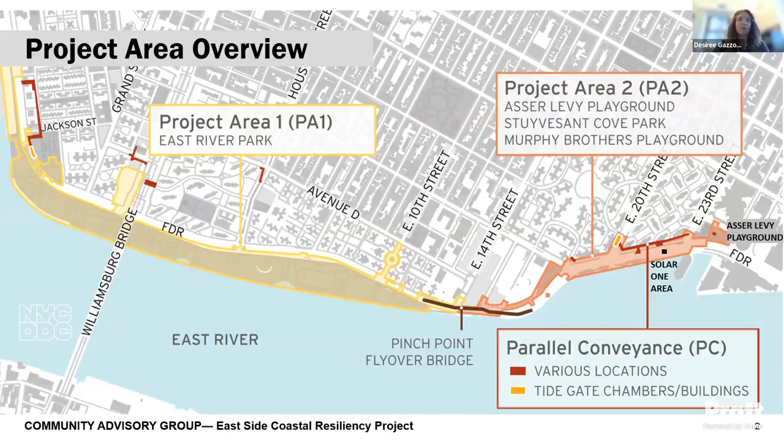So as we get into the presentation, this is the project area overview, which we are all very aware of. The focus area topics tonight will honestly focus mostly on construction progress. We have some items to discuss and a view of our park amenities, still under construction, and a couple of other items.

We did receive the letter from the CAG on the follow-up walkthrough items. So we have incorporated several of them in the 'what we've heard' slides, and the couple that we didn't require a little bit more explanation or time. So we'll either provide a response in between this CAG meeting and the next, or have a response for the next CAG meeting.

So just the agenda for today is typical: a hiring compliance slide, overview of contracts, which includes the environmental monitoring for PA1 and PA2.

So for hiring compliance, we have two Henry Street Settlement events that we'd like to share, one is an event and one is an opportunity. We don't have the official flyer for the Henry Street Settlement Job Fair yet. That will be on December 14th from 10 a.m. to 1 p.m. But as soon as we get it, we can share it with Paula and Tara, and they could send it over to you. So for now, there's just kind of a save the date in here.

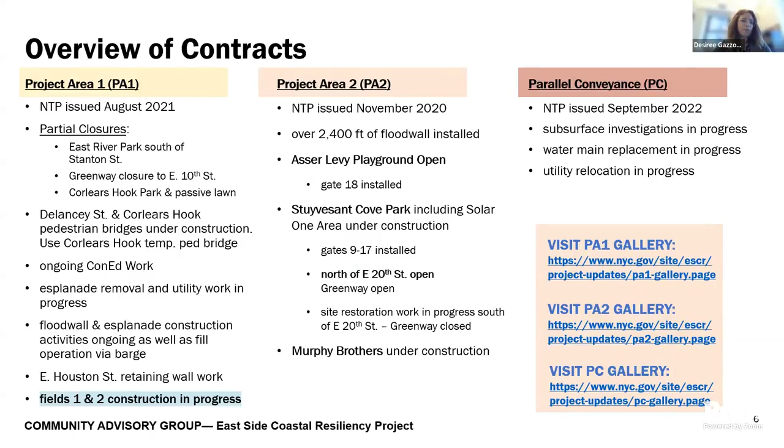So we just wanted to share those items from our partners. For the overview of contracts, not much has changed since the last CAG presentation. Much of the same work or similar work is underway, and we'll talk a little bit more about it in the slides coming up.

So we'll speak about PA1 construction progress first, that's where we have the largest chunk of information. We'll have about one slide on PA2, and then we have some information on parallel conveyance as well.

So for construction activities, the same activities: the esplanade removal, the deep sewer activities, there's still some ongoing that's finishing up. And then the pile install and park drainage work are underway. The flood wall, combi wall installation is ongoing, as well as the fill material placement and delivery. And then, of course, ball fields 1 and 2, which are under construction, which we have a really great photo of in the upcoming slide.

There's ongoing work at Delancey Street, and again we have been trying to remind the contractor to keep that area a bit more tidy than it was perhaps in the beginning. So our CCL Vanessa goes out there to check the site with the signage that we added as well. But if there are any other concerns, please don't hesitate to send them our way. The Delancey Street and Corlears Hook Bridge work activity on those abutments and footings are underway, and we have photos for that as well.

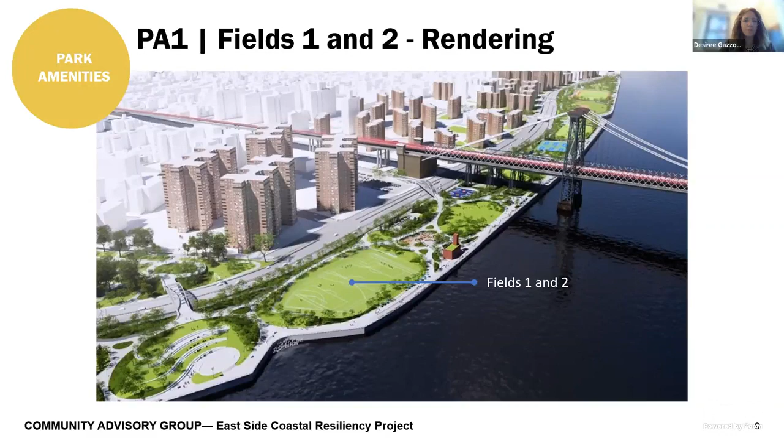So just a reminder of our Field 1 and 2 rendering here, just south of the Williamsburg Bridge, and this is the current progress. The last time we were here, I think we just showed the curb being installed, but you could really see the progress that they've made. The curb is installed, and I believe these are the upcoming fence posts that will eventually be installed as well. And then they're having the drainage layers, etc., installed for the field. They're really making great progress here, and we're very excited for this to keep moving forward and open in late spring of next year.

And then if you look to the back, you could see the Corlears Hook Park, and you'll see the retaining wall there. So that's from the front of the retaining wall. It's very small, but this is the construction of the back of the retaining wall. And then this will be the new flagpole area up here. As you can see in the rendering, that red line is the curve of the retaining wall that's here on the photo. So it's very exciting, moving forward with great progress. At the December CAG meeting, we'll have some more construction photos of the front.

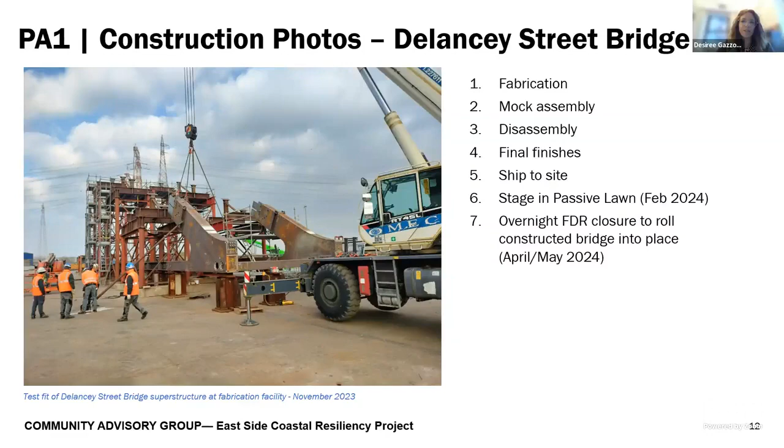So that brings us into, as we're moving into 2024, we're also moving into the transition of phase 2.

So again, in July, we presented the Esplanade plan, and in response to feedback especially from this group, from other local stakeholders and elected officials, we reevaluated that plan. Instead, the contractor will begin the transition from phase 1 to phase 2 while maintaining 42% open space for park users. We feel this balances the needs of the field and Esplanade users, and will begin in winter 2023-2024, basically here in December when park use is not at peak, instead of starting this transition in summer 2024 when park use is at peak.

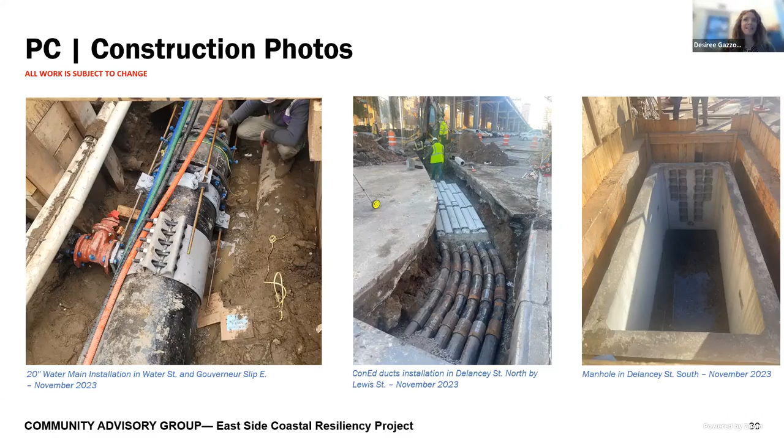Moving on with the construction sequencing, as we mentioned, as we moved kind of north, the Tide Gate Chamber and building work does need to occur, as well as the excavation for the interceptor gate chambers. And as we move into the end of this year and the beginning of the new year, that work is scheduled to begin at Corlears Hook Park for the interceptor gate chamber there.

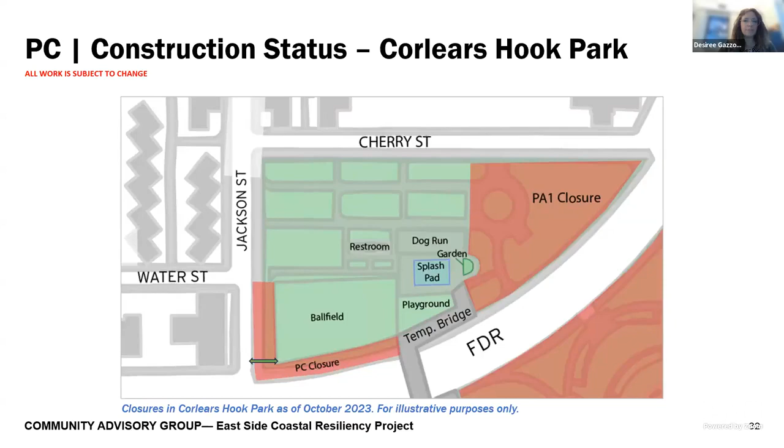The status for the Corlears Hook Park work has gone through several stages. The initial mobilization is completed. The test pits are completed. The utility relocation and upgrades is in progress. The utilities need to be relocated before the sewer lines can be installed, because the utilities are above the lowest sewer lines. And now the next step is the excavation for the interceptor gate chambers.

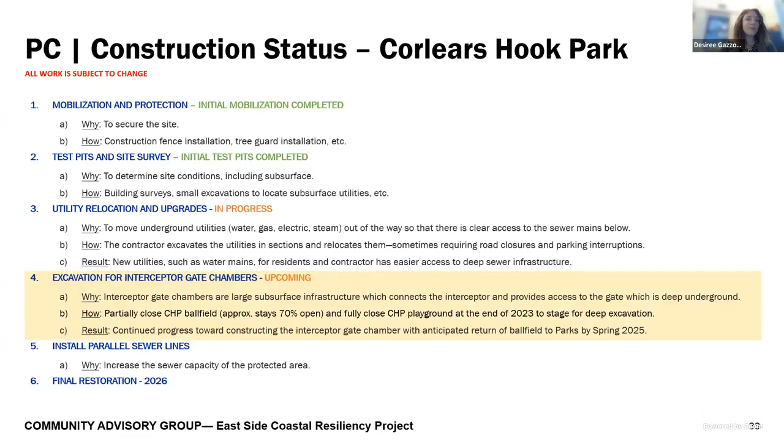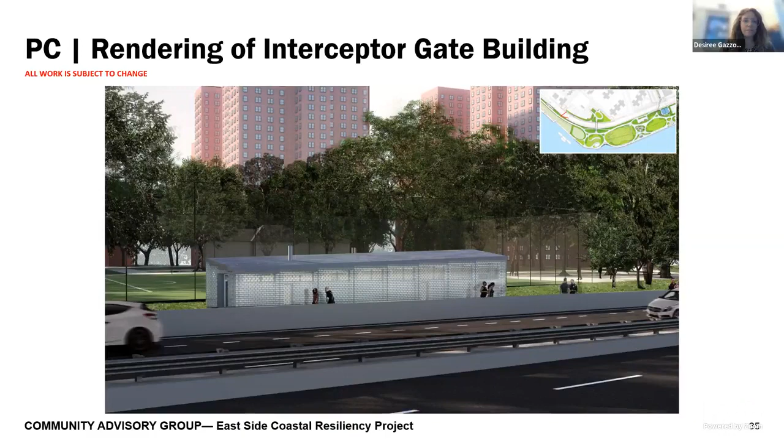As the contractor begins this work, they will need to take about 30% of the area of the ball field in Corlears Park. So this is the rendering here, showing the new extents of the closure. The playground is here, and this is the full ball field. So they will need to take a third-ish of the ball field as well as the playground area.

The use as a youth league field will remain, and parks will coordinate alternative locations for adult leagues that use the field. It is anticipated that the new synthetic turf will be installed in the open portion of the athletic fields this winter. The full closure of Corlears Park Playground will need to move forward, but access to the temporary bridge will remain.

This is so we can start construction of the interceptor gate chamber, which is a critical piece of the flood protection system that needs to connect to the interceptor sewer. The contractor will return the ball field back to parks when the work concludes, and the playground area will be restored. Conversations on the restoration of the playground area are just beginning.

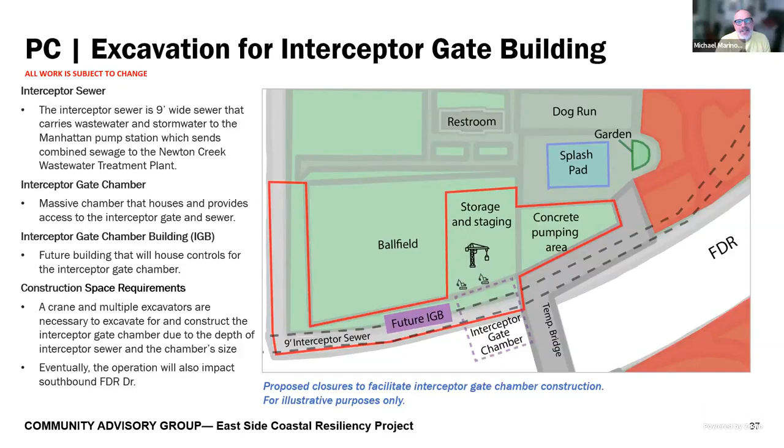So going back to the first set of slides, can you repeat again for me the date that you said Corlears would be reopening? So did you say May 2024? We're looking for late spring of 2024. Yes. Okay.

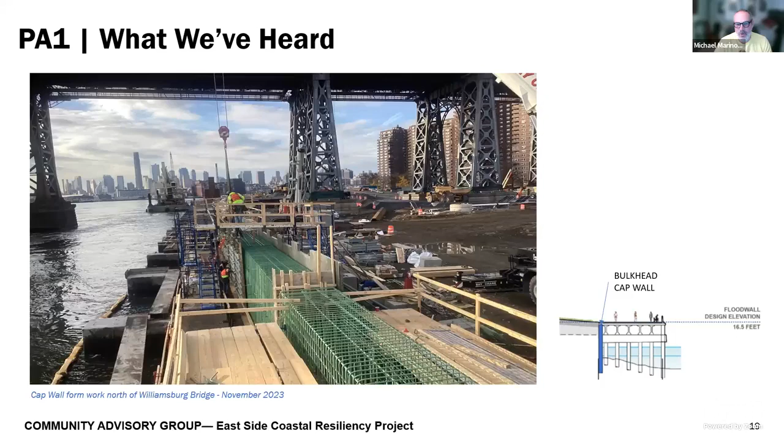Okay, so regarding the additional closures, I had a couple of follow-up questions. First, I want to let the rest of the CAG members on this call know that we did have advance warning of this. Desiree reached out last week to Friends of Corlears Park, and we had a meeting about it, so I'm not as shocked and surprised as some people might think. So thank you for that advance meeting, Desiree.

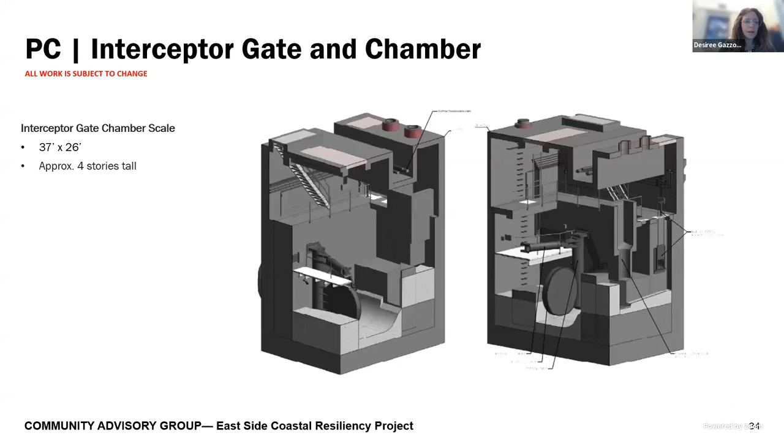So my first question is the one I had texted you a few days ago about - does this additional closure also include additional trees being taken down? Oh, yes. I didn't get a response on that yet, so I will follow up with that and the number. I understand that the additional closure is mainly just for them to have a place to store their equipment and all of the infrastructure needed to go underground.

It's not actually part of the build - there's nothing being built on that land. It's going to be returned back to its purpose. Correct, yes. The other question I had, I think you answered, and that was about the temporary bridge - so that's staying where it is, and access to it is staying where it is.

Correct, yes. Then I think the last question I had was, you had said something about the remaining ball field turf being replaced in the winter. So does that mean the turf is going to be replaced in two sections - the open part now and then the closed part when it reopens? So the parks had, under their improvements program, scheduled to...

restore the turf in the ball field this winter. So they are going to move forward with that because I think the ball field is in need of a turf restoration. That will move forward this winter, which would be great because this area might see an uptick in use since this part is closed, moving forward into next year.

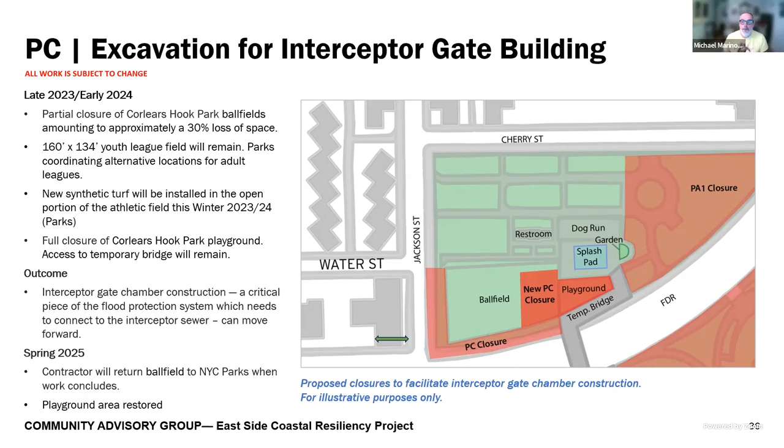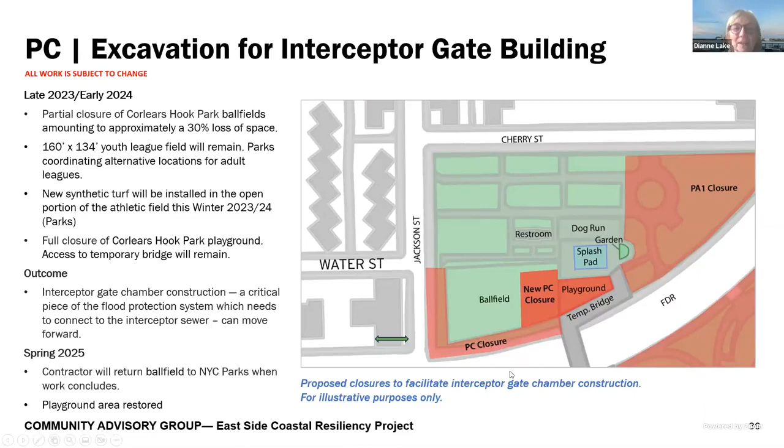Next is Dianne. Hi, Desiree. So obviously I want to go back to phase 2 of the East River Park work, project area 1. So you mentioned that the closures of fields 3, 4, and 5 are going to happen in December. December's tomorrow. Mid-December.

Mid-December. So it will be before the Christmas holidays. The closure will likely be before the Christmas holiday. Okay, yes.

I wanted to ask about the Lions, the football team. I use the park most nights, and I know they've been practicing under lights. I don't know their practice schedule, but I didn't know if you had been in touch with them, or Parks had. Parks would handle all of that coordination. So we could take that question back to Parks, but I don't know if they have been in touch yet. We'll take that question back and get you a response.

Okay, so with ball fields 1 and 2 reopening in late spring 2024, that's great, but that serves only a very few people. As we've talked about before, the number of people using the fields versus the number using the pedestrian paths and the esplanade is a lot higher. So do you have updates on when the pedestrian paths in phase 1 will begin to open?

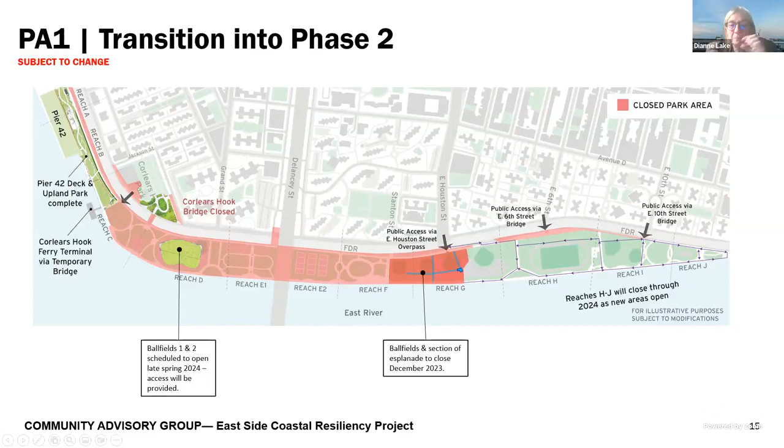The other thing I wanted to clarify was around the passive lawn. You talked before about the timeline for closure of the passive lawn to support the Corlears Hook Bridge installment, and mentioned taking a piece of the Esplanade. Is that Esplanade down there? Not a piece — the Esplanade we were talking about is already under construction. The reconstruction and demolition of the Esplanade currently ends right here, just east of the passive lawn. That's as far as the reconstruction goes for now.

And there's the way the Esplanade tie-ins work — they need to go into the passive lawn to construct these tiebacks. So just right underneath this, number 4, the contractor needs to take this little corner of the passive lawn area so they can finish the Esplanade work they've been doing along the rest of the Esplanade, which is what you saw when we were out in the field. I could pull up pictures in December, or send them over, of how those tiebacks work and how they pull so there's pressure on the wall, pulling it back into the park, which will then be covered.

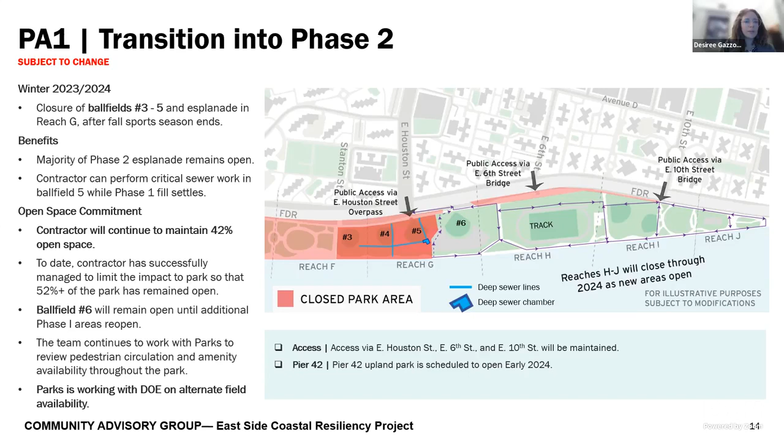Hi there. So when the passive lawn is closed in February, there's no water access above the ferry dock - is that true? When the passive lawn is closed... maybe it's slide 11... I believe the Esplanade will still be open here, but I can confirm that.

And will the parts of Pier 42 that are closed off now be open again, or no? That should be open, yes. The Pier 42 Upland is scheduled to open in the beginning of next year. So once that is open, then there'll be access down here, from the bridge to Pier 42 Upland and the pier.

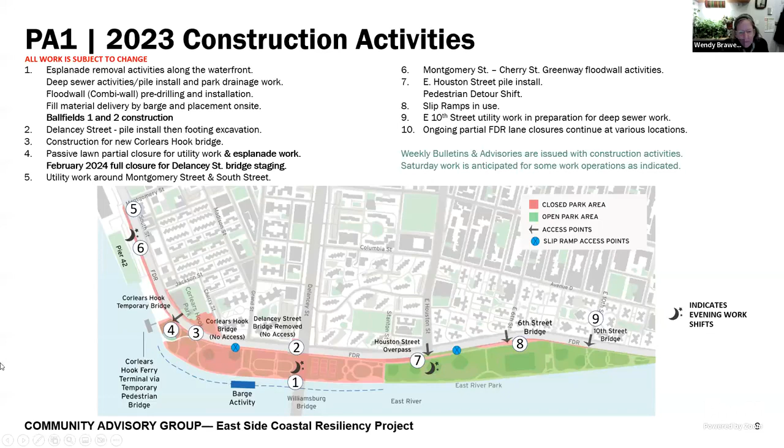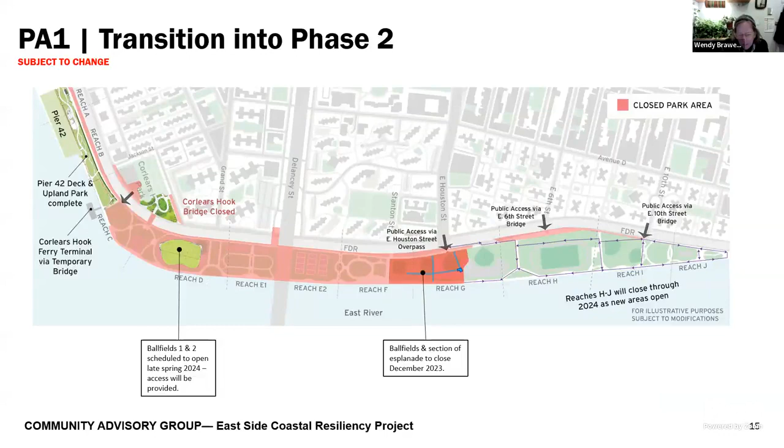And I noticed in PA2, the air quality overages that were logged were at the playground, right? At the Murphy Brothers playground. And I wondered, especially since children are playing there, what is the plan for these non-construction overage events? So Murphy Brothers Playground is completely closed right now for construction - it is an active construction site.

So there aren't any children playing here, and it is adjacent to the Con Ed site and parking lot area. One issue with the monitors in this area is that the only place this monitor could be located is sandwiched between the Con Ed facility parking area and the FDR drive. Similar to our Montgomery Street, South Street location, there is a significant amount of outside or non-construction related activity that happens in that area, which also affects the readings there. If you want more information on PA2AQM, we could talk about that at another meeting or offline. But in short, that is one of the reasons why this monitor is having higher alerts - it's in a peculiar location and there isn't anywhere else to put it.

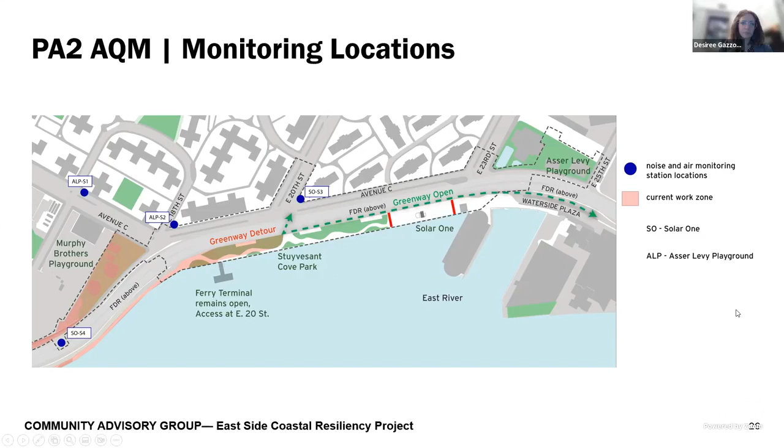So if there's not sufficient monitors... there's concern because you're going to be going down, right? You're going down 3 or 4 stories to put in the interceptor gate there. So I would think that'd create a very dusty situation for people playing on the ball field right there. And maybe it's not such a good idea to replace the turf right now, because it will also get covered in particulate matter from this major excavation going on.

So that's for me a concern, a public health concern. Regardless of if it's new turf or old turf, we have to monitor the air quality. And should an air quality issue arise, the contractor will have to address that. I'm not sure the turf replacement should be held up because of a potential problem. If Parks is going to move forward with replacing the turf, we have to monitor the air quality regardless.

During the construction, which needs to happen to move forward, as with all of our construction at Delancey Street, at East 10th Street, there's people everywhere where we're doing a lot of the construction, and we use the air quality monitoring system to control the dust and the air quality. The same applies here. Should there be an issue or a concern, it will be addressed by the team, the contractor, the city, etc. But construction happens all over the city.

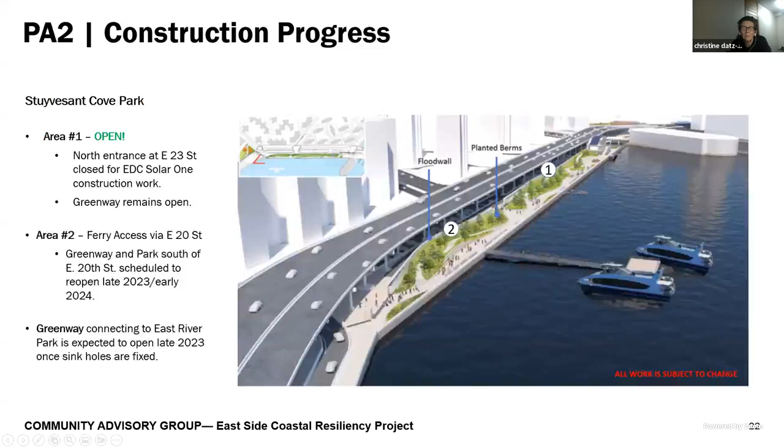And then I just want to make a few comments about the future closures of the ball fields. I appreciate you showing the math here, that is great, but at the same time it really feels like we are again losing amenities such as the Esplanade, which by the way is now a dead end. If you walk down the Esplanade now, you have to turn around and go back up. There is no way out.

Obviously, once an active construction site is next to it, it's probably less pleasant to walk there than it is now. But the dead end exists already. And again, we're sort of losing space along the water for walking, and we don't really have any updates or ideas of when any of that will be displaced.

I think on this slide, that green bubble, that ball field, raises questions of how people are even going to reach it. It's a percentage in open park, but it's not really a park experience if you're going through an active construction site to try to find a ball field that is just a ball field with no other amenity. It seems a little underwhelming in terms of what the community is really given in exchange for closing a significant part of those, 3 ball fields being closed in the Esplanade.

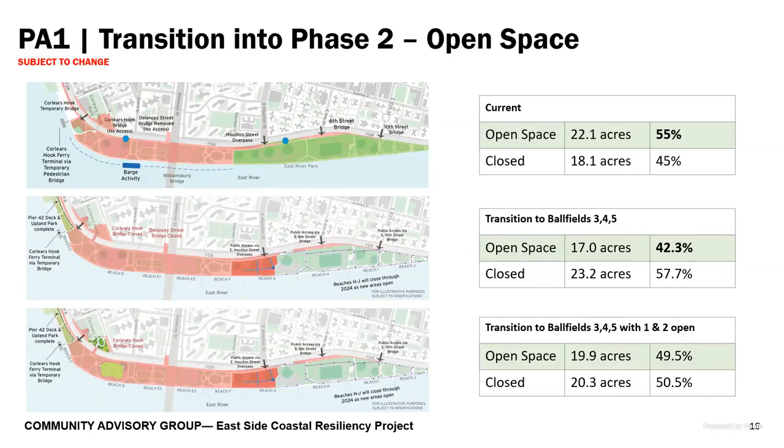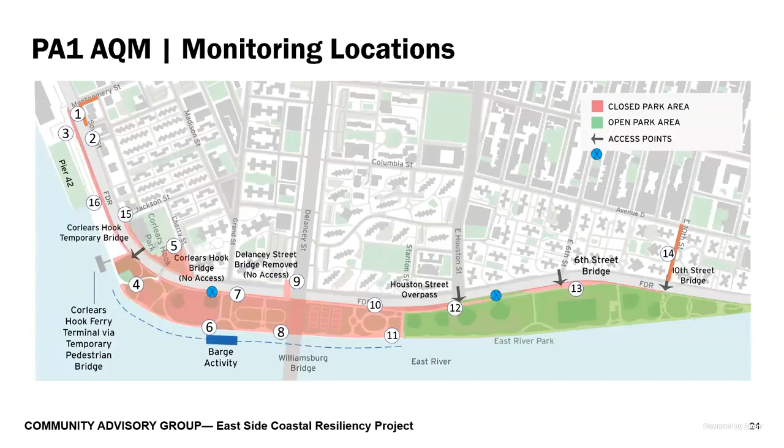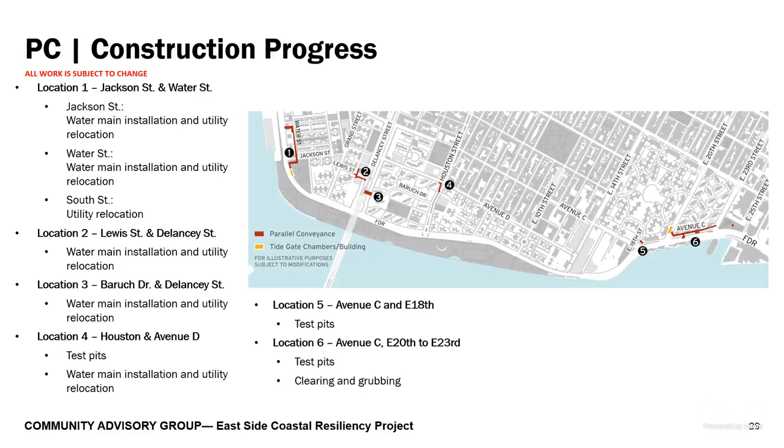I also wanted to touch upon the parallel conveyance - we kind of always go quickly through it, we mention it, but if we're able to get more details, this is actually happening in our front yards, right where people are living. If we're able to get timelines and a little more detail - we see the points, but I don't know how long we're going to be working on, let's say, number 1, 2, 3, 4, or 5. What's the scope, what's the limit, how far along are we on each of these? I think that would actually be very useful for us. Thank you.

Great, yeah, we can look to provide a bit more. Earlier in the project, for I think it was this project area, we had a chart that showed the different steps and was color-coded to show where we were. Perhaps something similar would work here, so you could see the status of each location instead of just the south and the north. But we could definitely look into creating something and providing more on that. Thank you for that comment.

Any other questions? There's one in the chat from Susan who had to leave. She asked: it looks like the 6 trees that will be removed for the parallel conveyance on 20th and Avenue C will be replaced, or is their removal permanent due to the new structure? Yeah, those will not be replaced because the building will be placed there.

We can check to see if there might be 1 or 2 trees on each side of the building, perhaps, so we could definitely look into that. But where the trees were removed is where the building will be placed, so it doesn't seem like they'll be replaced exactly where they came from.

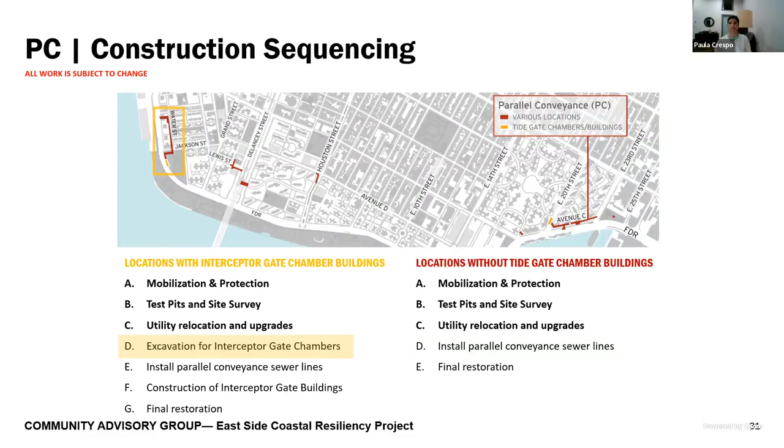I don't see any other questions. Okay, great. Well again, please feel free to send questions along, or pull together a list of questions and send them over to us. As mentioned, we did try to respond to most of the walkthrough questions. We will respond to the few that are remaining, and we could certainly respond to any other questions pulled together. And as always, you can use the inquiry tool, so you don't have to wait - we will respond to that. So again, it could be a combined question from the CAG, or please feel free to just reach out to us directly.